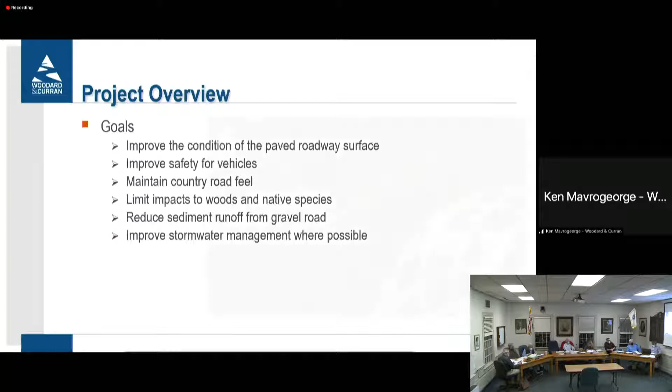For those on the call who haven't heard the presentation before, this is generally the extent of the project. It runs from Essex Street at Route 22 down to the Manchester by the Sea town line. It's just under 11,000 linear feet of road, of which about 7,300 feet is currently paved and in poor condition. What's shown on screen in orange would be a mill and overlay — essentially grinding off the top 1.5 inches and repaving that surface.

We talked about this at the last meeting, but we understand there are some spots along that stretch that are in poor shape and may need to be reconstructed. Those would be performed on a case-by-case basis. The remainder of the road, shown in green, is about just over 3,400 to 3,500 linear feet, and would be completely reconstructed.

We did do some geotechnical borings in this area with a geotechnical engineering firm to design a pavement and roadway section, to answer the earlier question about whether the roadway section would withstand increased truck traffic from a temporary construction project. The design is intended to be a typical town road. The remaining portion, because it's a mill and overlay, we aren't proposing to replace.

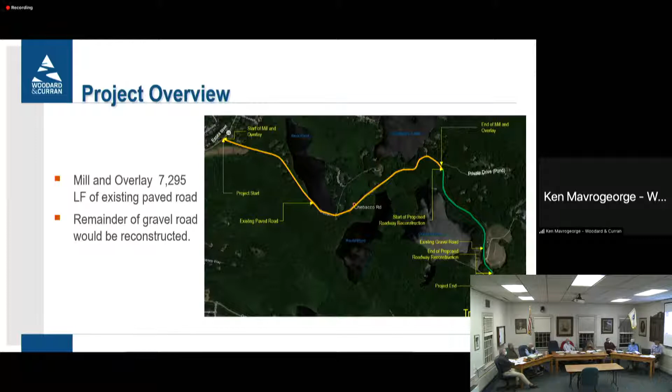It's up for debate what that road would be able to hold in the future, but I'd imagine based on its condition that it's seen quite a bit of traffic in the past. This is a portion that's been referenced a couple times tonight, but it's a relocated roadway portion.

What you see on screen in red is the existing location of Chebacco Road. The yellow is a 1964 right-of-way that was deeded to the Town of Hamilton from Manchester-by-the-Sea for the relocation of the road. The area in green is what we're proposing roughly for the relocation.

The goal here is to move approximately 1,200 to 1,300 feet away from Gravelly Pond as far as we can, all while trying to provide stormwater management with roadside drainage ditches to improve the situation and remove it away from a surface water source.

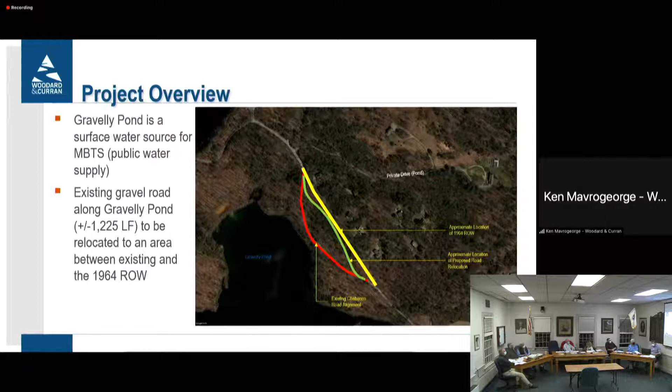This stretch here along Beck Pond is not a public water supply. I want to pause here for a second — this presentation is slightly different than what we sent to the board initially.

This is based on conversations we had last week — we had a meeting with local abutters. So we modified it slightly, not to change anything about the project, just to clarify some information, including that Beck Pond is not a public water supply, but the properties around here are on their own wells, drawing naturally from underground aquifers.

In this stretch, the paved surface of the road is in poor condition. What we're trying to do in terms of improvements is replace two failed retaining walls along Beck Pond that are allowing subgrade material from the road to enter the pond.

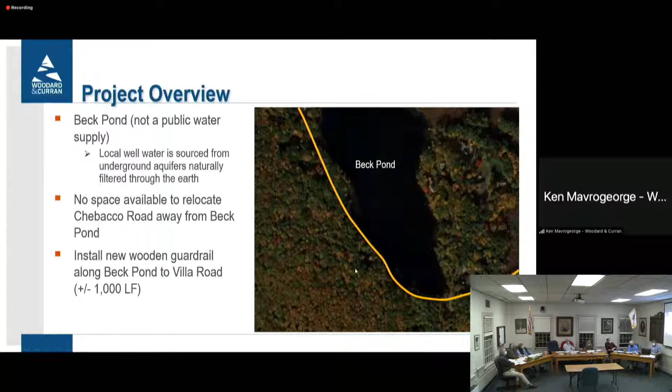We propose to install a new wooden guardrail along the entire length of Beck Pond that abuts Chebacco Road — essentially from Villa Road to where Beck Pond and Chebacco Road meet up. The project includes removal of two degraded retaining walls.

The upper right-hand image is the wooden retaining wall, and the bottom right is the new precast concrete retaining wall with an integrated wooden guardrail on top. A picture of a similar-looking guardrail is on the left-hand side.

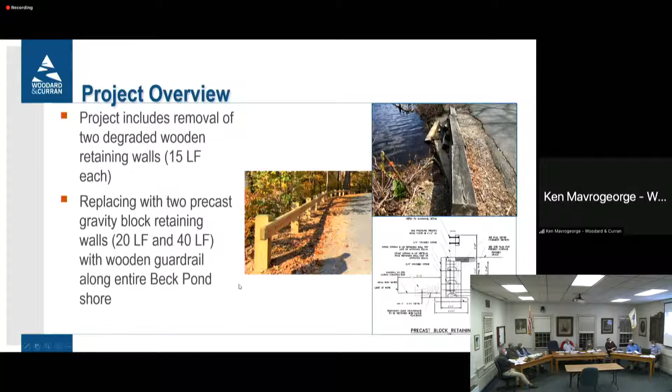The existing retaining walls collectively are about 30 feet, each about 15 feet in length, and the proposed would be 20 foot and 40 foot sections. They've been extended a bit beyond the existing wall so they can tie into the existing slope from the road down to the pond, providing stability and preventing washouts from wrapping around the retaining walls.

We've done a lot in terms of meetings. We received an order of conditions from Hamilton's Conservation Commission earlier this year, and met with the Board of Selectmen at Manchester-by-the-Sea in March. We have our ENF with approval from MEPA back in March of 2021. The Town of Hamilton and us are working to wrap up bid documents and plans, and we're continuing to plan for town meeting.

We received approval from Hamilton, Massachusetts for the Article 97 process, which I'll get into, required for the relocation of the road, and we received approval at the town meeting on May 1st.

The relocated road is of particular interest to the last commenter — the existing gravel road is located within a conservation restriction area, so in order to move it we need to go through the Article 97 process from the Massachusetts Constitution, which allows the transfer of conservation restriction area between two towns. We're working with Hamilton and Manchester-by-the-Sea to get this approved at both town meetings, draft the legislation, and get it voted on at the state level prior to putting this out to construction.

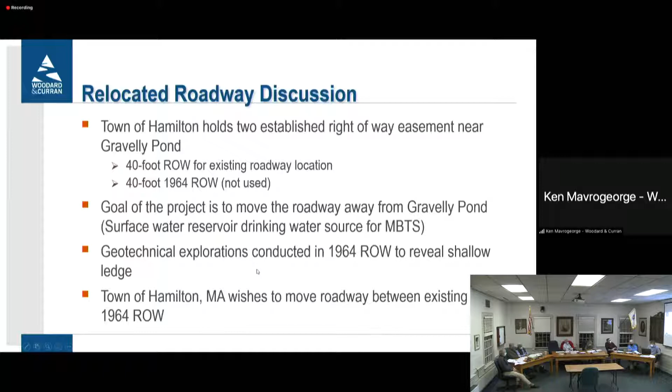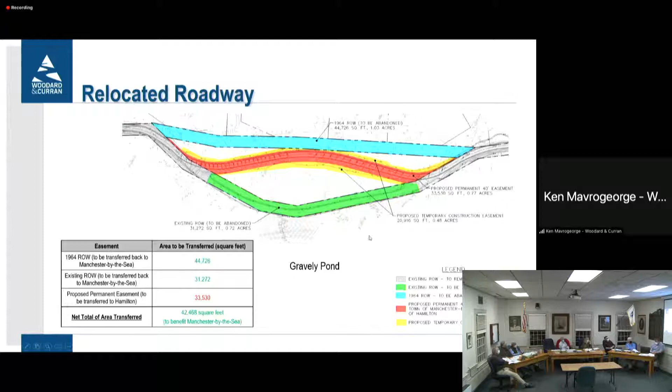So what are the next steps? Obviously, we're meeting tonight with the planning board. In a couple of weeks, we'll be at the Manchester by the Sea annual town meeting, and hope to receive approval from their constituents to approve the Article 97 documents and the warrant up for vote. If that goes through, then we'll finalize the legislation in December of 2021, with an anticipated bid in January to February of 2022, and construction March through September.

So with that, I'll point out there's just a couple of pictures of the area. On the left-hand side, you can see this is that trench drain that was brought up about the salamander crossing, basically at the transition point between paved and unpaved. That unpaved portion is just burying that trench drain. The lower portion is a selected area where you see really degraded pavement condition. And on the right-hand side, you see Gravelly Pond. This is an area where we would propose to put guardrail to protect vehicles from entering into the pond.

I'll note, because it is a scenic roadway permit that we're seeking, that we're not proposing to go beyond the existing footprint for the existing paved surface, essentially just milling and overlaying in the same footprint for nearly 7,500 feet. The remaining portion of the road does vary in size from 17 to 22 feet or more in width. What we're trying to do is propose a roadway that is a 20-foot paved section, so it's consistent.

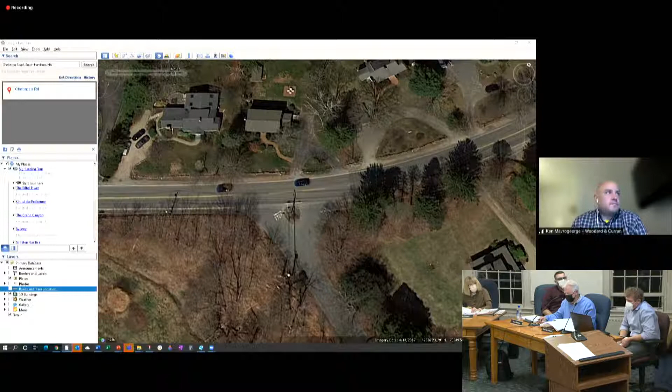Okay, thank you, that's helpful. So that's to be determined. Another question that maybe your aerial or some of the other graphics might be helpful on: can you show us the areas where tree clearance is anticipated?

So as part of the project, we are trying to limit as much tree clearing as possible. I'll point out that this is along Gravelly Pond. In this area, there are quite a few dead or dying trees that would likely have to come out in order to replace the retaining walls you see on the screen, or to install a guardrail along this edge of the road. The intent is to salvage or limit the clearing to the dead or dying vegetation.

Now, in some areas we've talked about improving driver safety and visibility, improving sightlines. If we head down towards the Chebacco Lake boat launch, there's a sharp corner where a number of trees really do basically block adequate sightlines. So we are proposing to take out this tree right here in the corner. We understand there's been some accidents in this area.

There's a culvert that crosses the road, and as you can see right now, it doesn't grade well to get to that culvert location, which results in water ponding at this corner, making it really icy in winter conditions. So we're removing this tree.

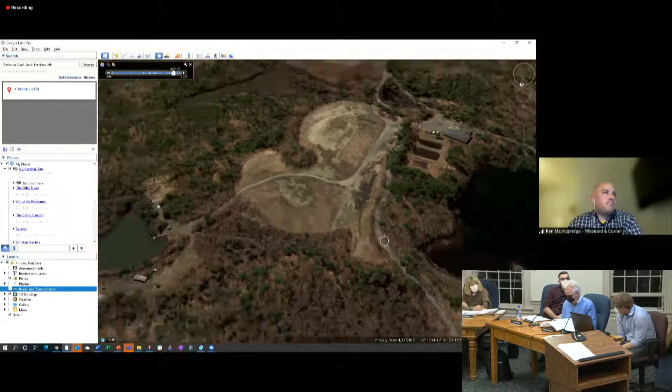Thank you, Ken. Just as a general comment, it's been my experience that the better you make a roadway in terms of visibility and drivability, the more likely people are to be a little more careless in how they drive. So that being the case, and understanding there's a great deal of pedestrian activity and enjoyment on Chebacco Road, I think it's important to commit ourselves to asking our Hamilton Police Department to enforce the speed limits and the traffic signage that will be placed as part of the roadway, for the betterment of the motorists as well as the pedestrians and residents that live there.

Could I add one thing to that, Patrick? Please. In addition to safety, this is also a financial investment in infrastructure, which I support the reasons for. But given that you can't really do a traffic study to anticipate the change, though we know there will be one, is there a way to put in place some mechanism of monitoring this—how well the investment is holding up, whether it's degrading from additional traffic, whether there are safety issues—instead of waiting for failure? Is there a mechanism that can monitor this more closely as you see changes in behavior?

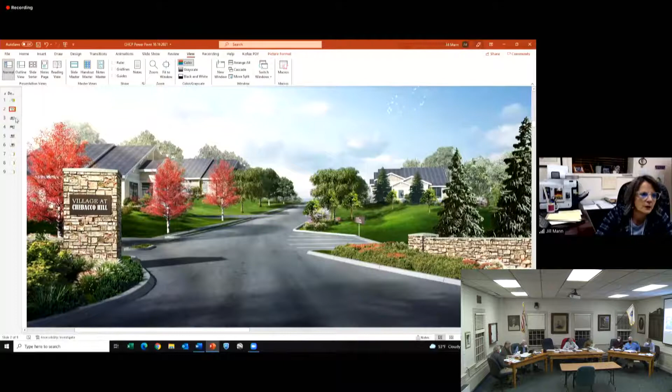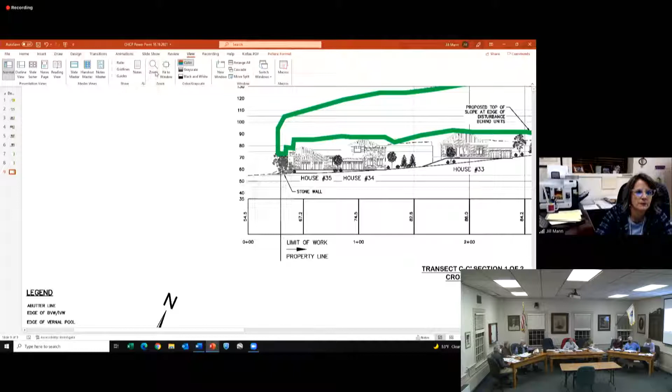Elevation. I'm going to show this again because I think it's easier to speak about when you're looking at it. That's perfect. So what's missing in your renderings is an appreciation and understanding of what that site section shows. So all 3 of these renderings are missing that information.

No, you shouldn't need to throw them out. You could use these shots. For example, I'm assuming if you did a 3D model that those slopes behind the buildings are modeled. Is that true? I would have to ask if Brent's on the line. Hey Brent, Mr. Ruth, if you could make him part of the panel so he could actually speak, because he did these cross sections and then provided them to the person that actually modeled it for us.

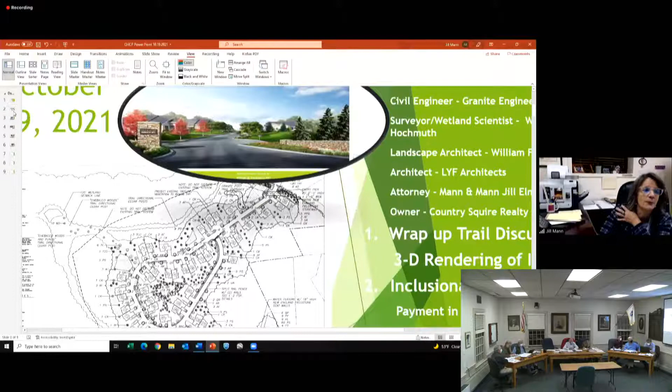One moment, Mr. Poor, I see him coming on. Here we go. Okay, so Brent, I think you heard Mr. Poor's comment. Did you model— I'm going to jump up, I apologize for jumping around, and I'll probably jump to the wrong slide each time. Did you actually model behind the homes in all of these pictures?

For the record, my name is Brent Cole with Granite Engineering. To my right is my colleague, Jeff Merritt.

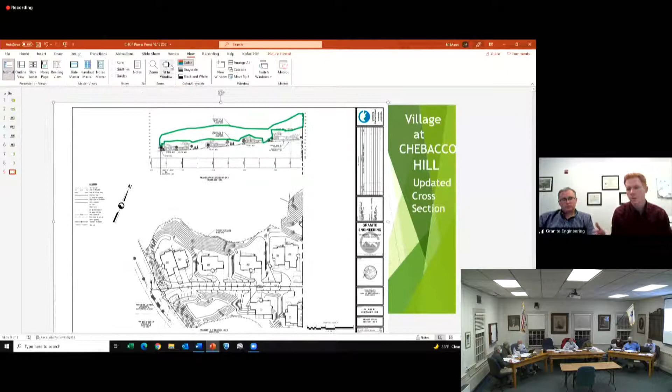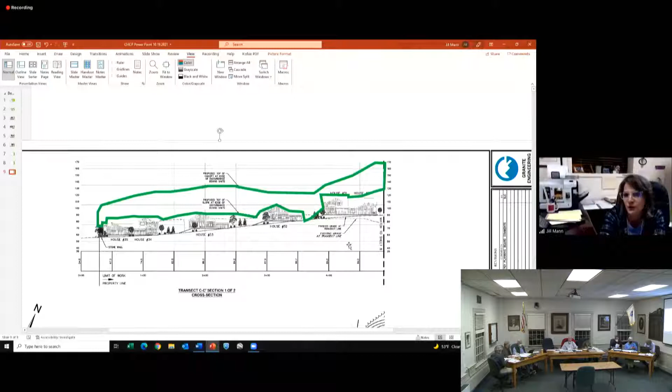Right, but Jonathan's point, Mr. Porter's point, is can we revise it? Will there, in your opinion, be a change? And is it possible to revise that? Before we do that, let's not debate that for the moment. Let me finish going over a few numbers, and then I want to back up to Chebacco Road context for a second.

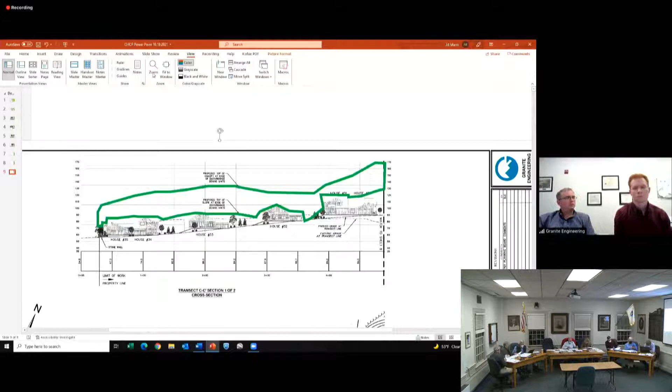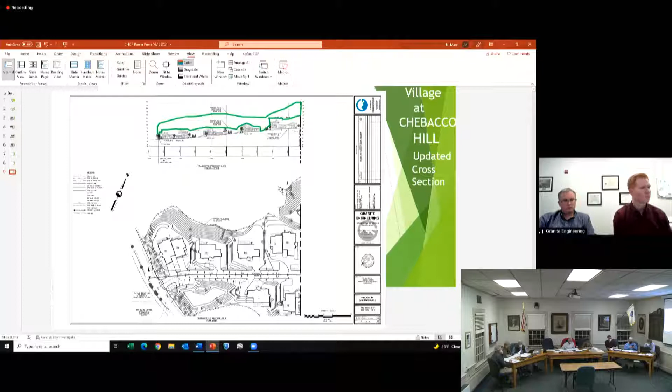So, basically, through some calculations and sight lines, it would appear that from various vantage points on the street, depending upon where you take the shots, you would see the top of the 90-foot slope. So you're at the street, standing at 55, and looking over and between buildings, and basically the roof lines from units 34 and 35 -

Roof line is 86, looking at 90 and 130 behind it for the top of slope. Unit 33 is at 96, and again you're looking uphill to a 130-foot elevation, top of slope. So even all the way up at unit 29, the roof line is roughly 124 with a 130-foot elevation slope behind it. So generally your top of slope, where the edge of disturbed landscape is, is generally above your roof lines. And while maybe the views you chose don't show that, my calculations tell me that at various points you see those slopes.

So, let me just segue to Chebacco Road for a second, because those slopes need to be discussed in a variety of different contexts. Chebacco Road, it's interesting to survey it a bit. What I did is look at the landscape characteristics at the street edge, the driveways, the structures, the signage, the miscellaneous road furniture, and then any exceptions to the patterns in it.

As far as the landscape characteristics of the street edge, generally all the way up and down the street there are, in most places, undisturbed forest, including the understory vegetation and detritus. The only places it is disturbed is with smaller houses, and those smaller houses are nestled into the natural slope behind them, again with undisturbed forest.

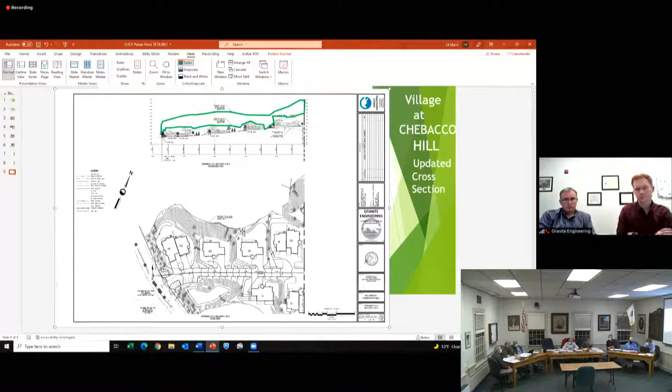The larger properties generally have completely undisturbed forest as frontage, and quite often their driveways head off, even if there isn't a slope, at an oblique angle, so it's difficult to see the structures on the street frontage. And if it is going up a slope, the driveways tend to traverse the slope at an oblique angle, so you can't really see what's up the driveway. I don't think there are any driveways that have been blasted to get through - not to say that you can't blast, I'm just observing what the pattern is.

So, any of the buildings on Chebacco Road are modest in scale. Again, their backdrop is they have street trees in front with the forest detritus removed from under those trees, lawn coming forward, but then undisturbed forest right behind them. Any larger structures have the forest in front of them. Generally, the signage and road furniture, or any structures, are fairly naturalistic in character.

For example, the signage at the public landing is something you might see similar to a state park or national park - it's a natural landscape boulder with a bronze sign on it.

The exceptions to this pattern are the Manchester transfer station, which I realize is beyond the town lines, but it's interesting to note because it's characterized by undisturbed forest in the foreground, sometimes quite a bit of forest. But since it's deciduous, you can see through it, and what you notice most dramatically is the 2-to-1 slope that makes up the body of the transfer station, which stands out starkly in contrast to all the other elements of Chebacco Road.

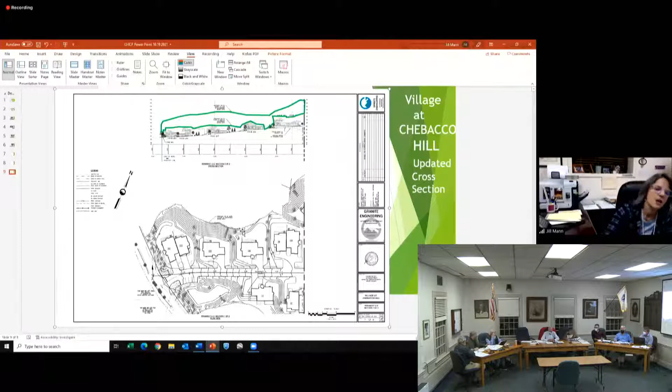So I think there are ways to get this project more in alignment with the context of Chebacco Road. Now it all comes back around to decisions being interwoven. If we start with the purpose of the bylaw, 8.2.1.1 talks about variety of housing. I'd be curious why, as an applicant, it couldn't be explored to have some cluster housing up in the middle of the project instead of this dense subdivision pattern, which is forcing your slopes to come right out to Chebacco Road. Your first unit is right on the road.

I'm not sure what you mean by cluster development, but keep going and I'll address everything at the end. I just figured I'd show you this. So basically, the question would be: units 34 and 35 are really pretty hard up against the road, and right behind them are these steep slopes and a lot of cut to the topography and removal of native trees, which again is not in character with what I just described as the nature of the entire length of Chebacco Road.

I would concur with Bill that getting these first couple buildings further upslope in a denser fashion - that's why I said cluster. 8.2.1.1 says variety of building types and variety of price points, though that's not the exact word - maybe somebody can help me with the wording. I'm not saying density isn't a good thing. I'm saying density is good, but let's get it in the right location and not have it pressed against Chebacco Road, where I believe it's not in harmony with the neighborhood. In addition, you've got your steepest slopes for driveways and sidewalks right at your critical intersections, and addressing this could probably mitigate those issues as well.

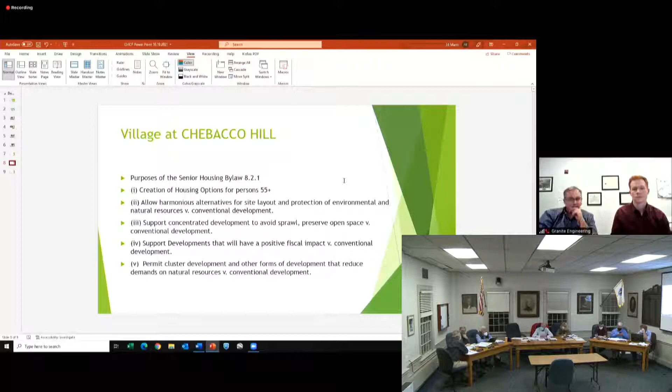This could honestly be a conversation that goes on for hours. Ms. Mann, I think you opened up a couple of things I'd love to get into at some point, probably not tonight, because it looks like this particular topic is the entrance.

One thing I always liked was a definition of a site plan, which is a synthesis of the art of man with the beauty of nature. And if you look at the renderings, with all respect, there's nothing there that represents anything of what's existing on the site, it's all new work. So there's not a synthesis going on. One of the aspects of incorporating new construction into an existing setting is to use what's already there to your advantage, to use it in a way that makes it effective.

One of the striking things driving along that road is that ledge outcrop. Now, I know you need to run a road through to get up there, that's no question. But I think Bill's comment is that it's where you place the buildings that makes all the difference. One of the things I'd like to come out of this discussion is to get you, the applicant, to complete the site plan showing all of the conservation-like features on the area which is now going to be developed.

Right now, it appears to be like a blank spot in the middle of your basic plan. I think identifying all the steep slopes greater than 25%, which is sort of the standard for conservation subdivisions, 25 and now 50%, you're using those on your slopes. But to map and identify all of the features, not only the wetlands and buffer areas, but the steep slopes, and identify it perhaps in color.